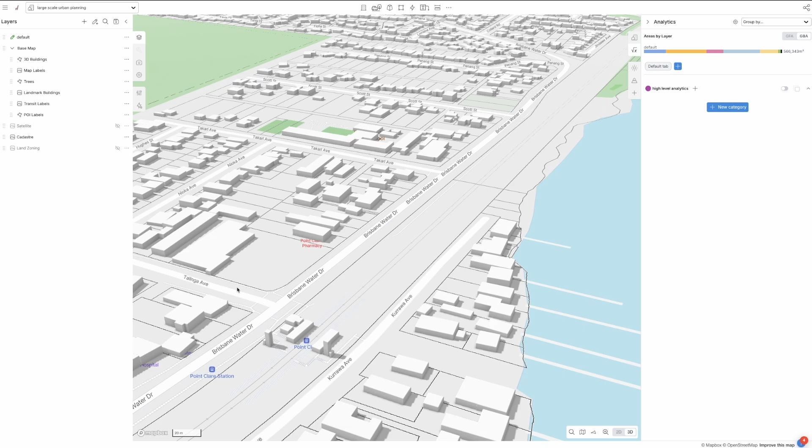In this demo, I'm going to show how Giraffe can be used for large-scale master planning. Now, it's much the same way in which Giraffe is used for small-scale site planning or site feasibility, plus a little more, plus a few extra tricks and techniques. But the first thing to do is understand exactly how Giraffe works at a low level. And when you do that, to blow it up to a high level will be quite straightforward.

So the first thing is Giraffe is letting you overlay the data. So this is the geospatial data. We connect to tens of thousands of data sets that are in public. But if your data is not there, you can very easily connect to it to a map server or feature server or an OGC server of some types, WMSs, or upload shapefiles, other geo formats like a GeoJSON, or just raster, like just some screenshots.

You can geolocate them. And say someone's done a sketch of a master plan, you can just upload that sketch and model over it. And that's very critical when you're master planning, because basically that's the context. That's what's going to drive your decision making, perhaps more than any other single factor.

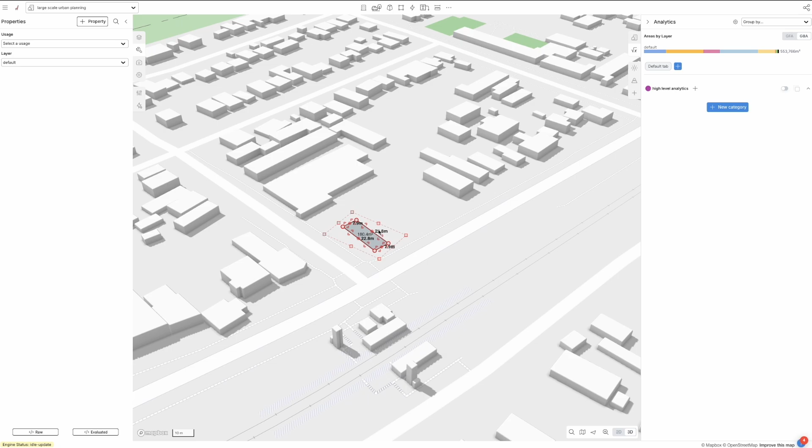Now the next thing that Giraffe does is lets you draw shapes straight on the map. So let's say I'm looking at this site over here. I'm going to draw a building. You can see it's to scale, it's geolocated, and I can sort of change things around. Now, currently, when I say building, it's actually just a polygon. So to make it a building, we have to give it some data, so give it some assumptions.

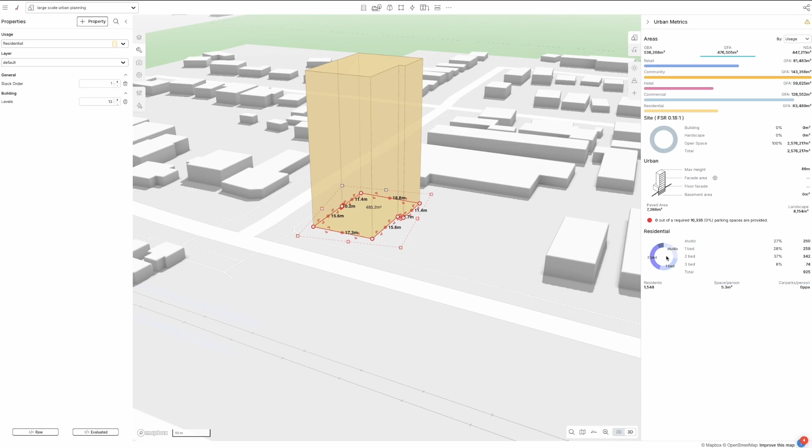So I'm going to say this is a residential building, and all of a sudden that building pops up. And I can add levels or remove levels. And the color and the areas and the number of dwellings that Giraffe is suddenly displaying on this right-hand side are coming from the intrinsic properties of this polygon. So its area, its perimeter, and the assumptions in the residential usage. So Giraffe typologies or usages are the controlling assumptions which sort of underwrite the deal.

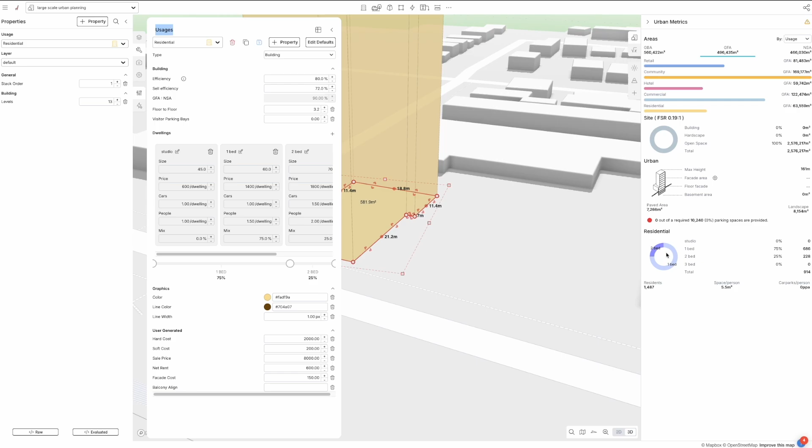So for example, if I get rid of all 3 beds and make this building a combination of 1 and 2 bedrooms and leave its efficiency untouched, I hit save, you'll see down here now we only have 1 and 2 bedroom units visible in the scheme. And that's because this building and these assumptions are combining to this output. And I'll show you in a bit how you can make custom analytics.

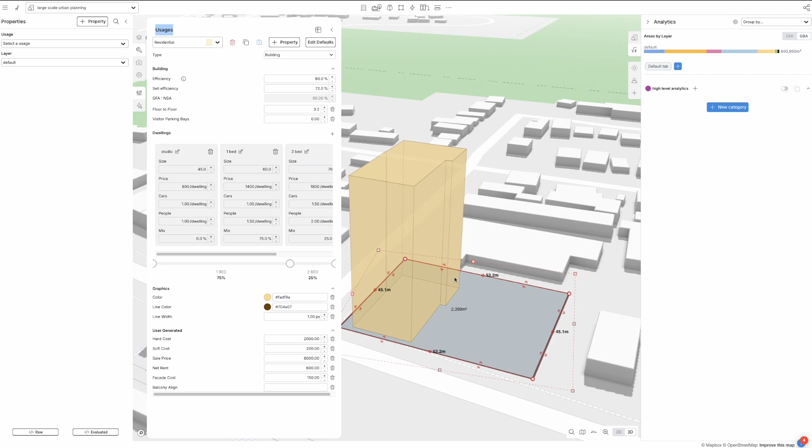But for now, as long as you understand that Giraffe is a data-rich map of the world upon which you draw geometries and you assign assumptions to those geometries, and that means that Giraffe is able to use those geometries to drive analytics and reporting, you've got the core of Giraffe at a micro scale or a site scale, but also at a macro scale. But when we're talking at a macro scale, often the geometries don't just represent buildings.

So let's jump to a macro scale, something like 5 square kilometers. So that's even this gigantic area. That's only 2.5 million square meters, so 2.5 square kilometers. So I'm not going to master plan the full 5 square kilometers, but I'll start doing a big master plan. And the first tool that Giraffe has to help you do that is what we call land uses. So that's something like commercial core. So I could say, look, I'm going to draw a commercial core in my new master plan zone like that. And that's just a big blob.

And if we open that up, it's got a floor space ratio, a height, a site coverage ratio. And that's enough to calculate, without drawing the buildings, what the built area would be, because that's going to be the control to which the private sector developers are actually going to build. So they're not going to build the blob. They're going to build lots and lots of buildings inside the blob, but those buildings are going to add up to the floor space ratio times the area of the blob times some take-up factor.

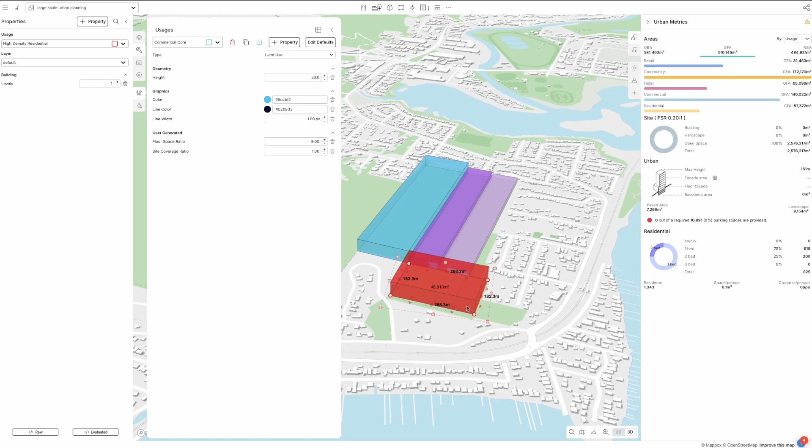And the reason we are doing it like this, let's call this high density residential, is because we don't want to overwhelm ourselves with detail. If we do, and we start arguing about street placements, etc., we can very, very quickly become overwhelmed and start missing the wood for the trees.

Right. And let's say now, let's actually add some roads. So what I'll do is I'll grab that, I'll use the X key and do something like this. So we're just going to connect these roads on like that. And then maybe there's going to be a cut through road, something like this. Okay, there we go. Now, what we can do is we can pull out the road reserves and actually show what they would look like.

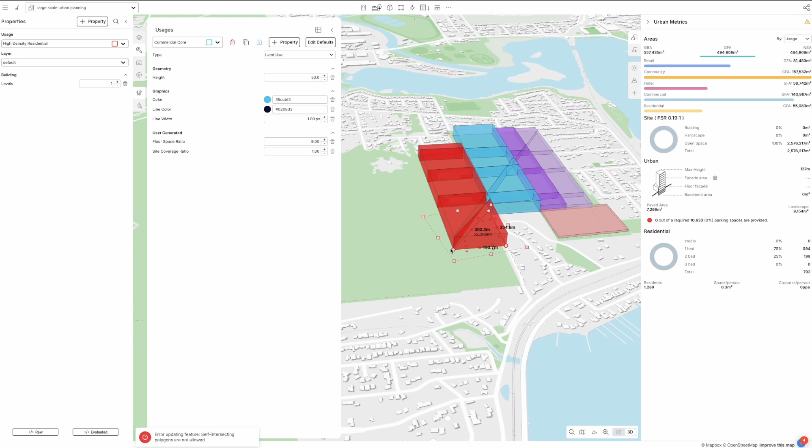Or we can leave those road reserves visible. And both methodologies, from my perspective, work great. I've seen in various cities both of them taken. I'm actually going to cut the road reserve out just so we can see it explicitly. And I'm using liberally the X key.

If I turn on the actual land zoning in New South Wales, you can see they do not cut out the road reserve. You can see the polygons touch. They don't give a gap for the road. Whereas if I turn on the cadastre, you'll see there's a gap for the road. But the land zoning itself goes over.

In fact, certain roads have their own SP2 use, which in our world is a special purpose use, which we very well could do here. So one could, if one were keen, draw something like this and give it a special purpose use, but I won't. All right, this is looking good.

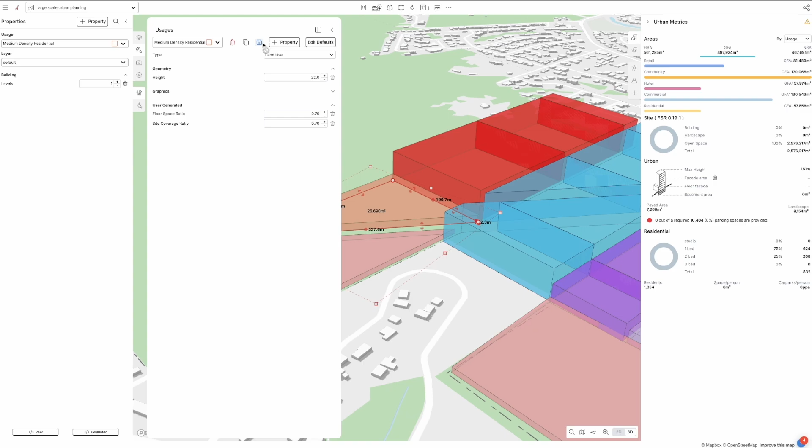Maybe we do this. Now I can use the eyedropper key to lower the density over there. Let's call this medium density residential. So you can see there. Now that transition from low to medium to high is not right, but I have full control over the assumptions. So I'm going to get my medium density residential. I'm going to set that to 22 meters. And I'm going to save. That's going to jump up there now like that. And this is starting to look good.

I may say, why don't we put a bit of a high residential core over there? I may actually say, this commercial core, we're going to override the height. So I'm going to grab a height property over here, and I'm just going to override this at 100 meters. And this will start to look familiar. This will actually start to look like a town plan.

Now, this is only half a square kilometer. So despite how crudely I'm working, you can see how long it's going to take to do 5 square kilometers, about 10 times as long as this. So I'm going to stop here, and I'm going to quickly just add a measure just to show what we can do. So why don't we add the derived population here?

So I'm going to add a measure, and I'll say projected population, and it's going to be in people. And I'm only going to apply it where the usage is equal to high density residential, medium density, low density residential, and also mixed use. So I am not going to use this actual residential key usage. That usage is a building usage. So I'm going to do that. So that's going to filter the geometry, the Giraffe model.

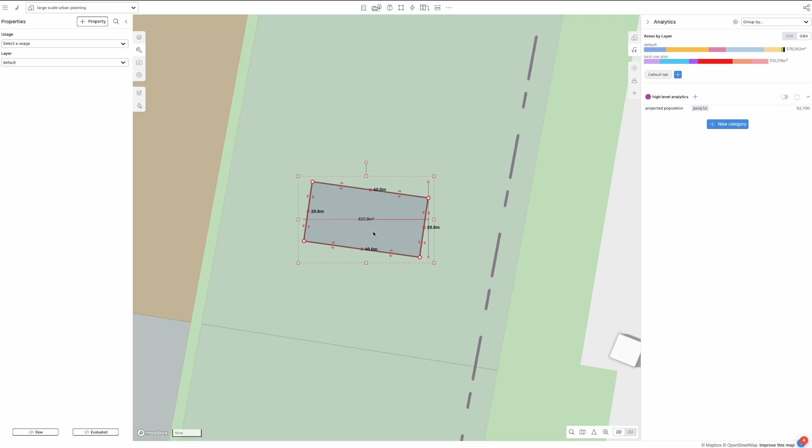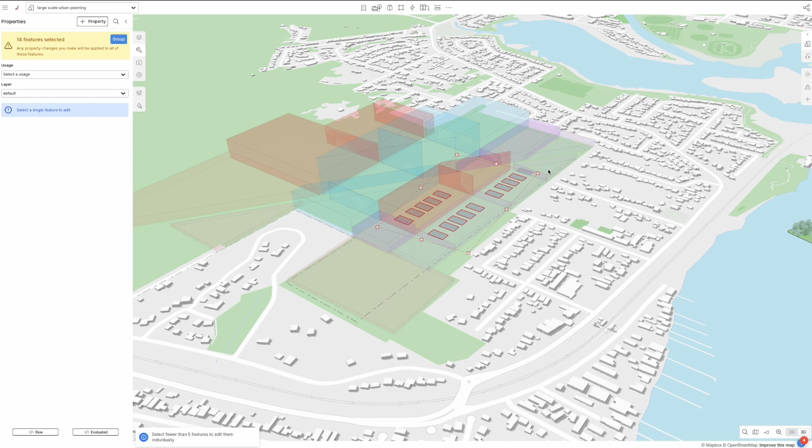If we were to draw every single building manually, an 800 square meter building is actually a good size for an apartment. If we were to go like this and this, it's going to start taking a very, very long time, far too long to be worth it. Giraffe does allow multiplayer, so we can share this project and then other people can hop in live. And so you can actually make pretty rapid progress just by copy pasting stuff around the map and designing bespoke sites.

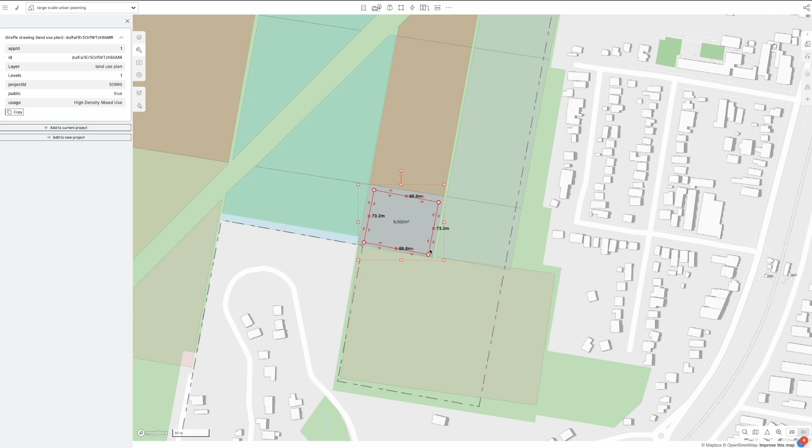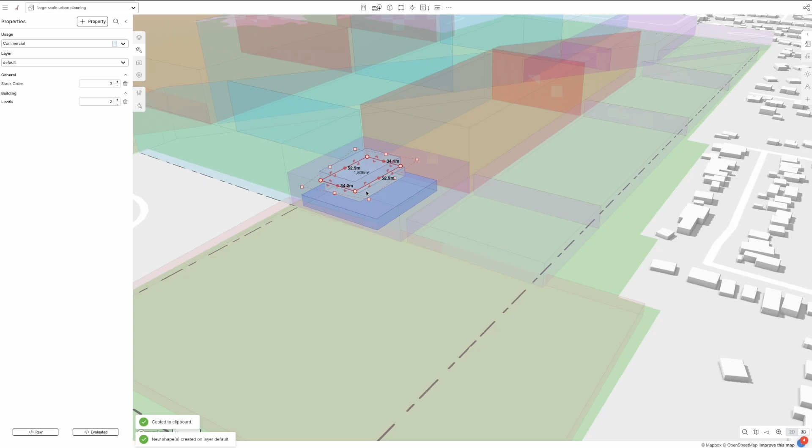So say, for example, this is a land use, this is high density mixed use, right? So I could say this was my responsibility. My team has given me these sites. I could very quickly do a podium and make it retail, 2 levels, straighten it up, pull back like this, and then draw some commercial on top of it. 2 levels of that, and then copy and paste that and get some residential on top of that. Shrink that down, right?

And you can see I'm penetrating the height plane as allowed by my zoning type. So maybe I'll lower that number of levels, and I'll do more of a U-shaped building. So we're not doing a point tower now, we're doing an actual U-shaped building. And at this point, you can see I'm slowing down because I'm trying to get the built form accurate. So a 20-meter depth for the buildings is actually buildable, or else you're going to get these very deep apartments.

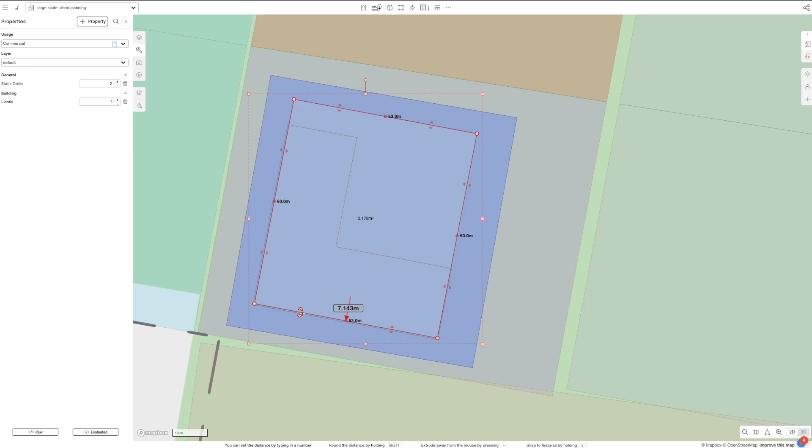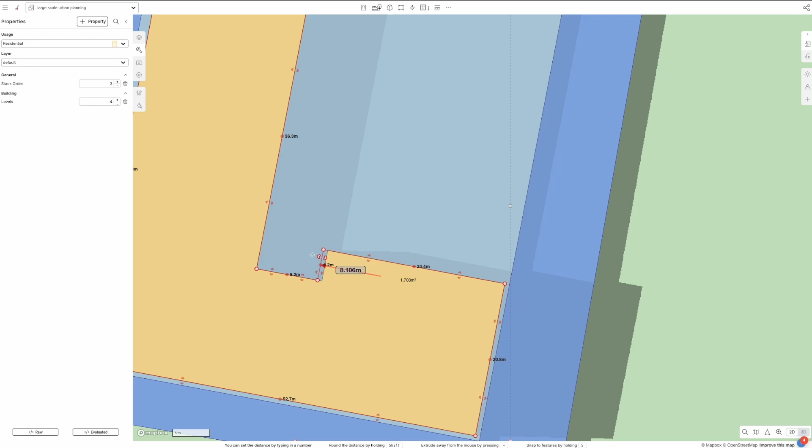And if I turn off the land use plan, you can see what we're dealing with over there, which is not quite a building, but it's a much more detailed envelope about what a building may look like. It's taken all of 3 seconds, which is good because we've got a lot of site to do. So if we turn this back on, get it back down to 10, we can then start going site to site. And of course, we can make liberal use of copy paste where we can, but this is still quite a manual and slow process.

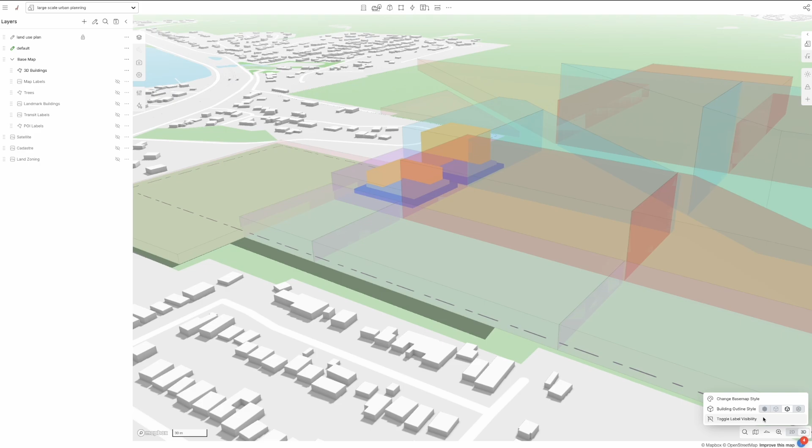I'm going to change the render methods here and just turn that on. And that's for some reason turned that on. That's fine. And that just displays the floor plan. So now you can actually see more what we're looking at. And as we're working, what Giraffe's doing is it's gathering these areas and it's grouping them up and it's looking at them. What I would actually do is in my settings here, I'll turn off the charts, and I will also group by layer. So we'll see default in the land use plan.

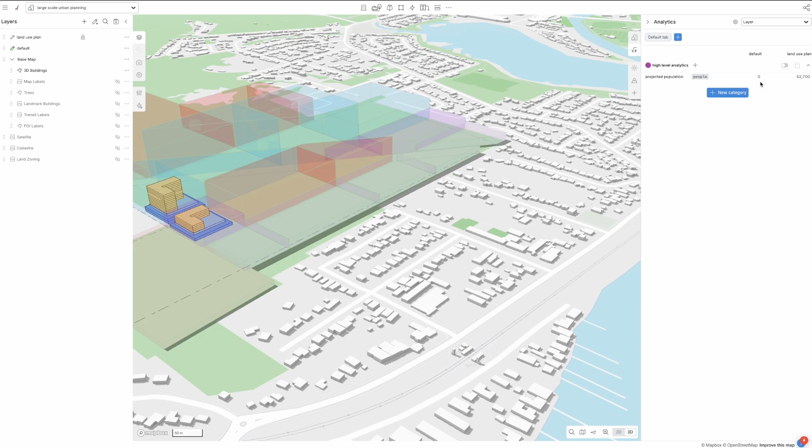There's no projected population on the default because remember in this metric, we only apply it to those land uses, not to this residential use. So to apply it to the residential use, what we would do is duplicate that. And then hi-fi pop forecast. And rather than doing this, we will filter it down to the residential use. And we'll go area times, we won't go to floor space ratio. What we'll go is net area. So actually we'll go saleable area.

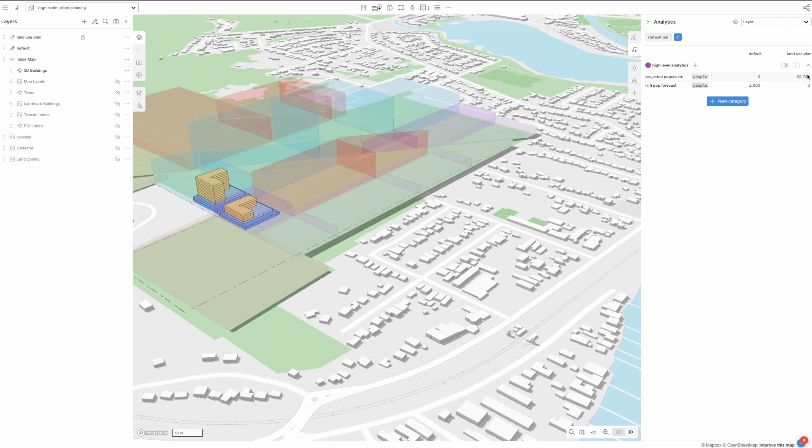And the calculation will be a little bit different. It's saleable area. There we go, divided by 80, times 2, and then we save those changes. And that's only 2,000 now because we've got a lot of sites to fill up to make this number match that number. So hopefully that makes sense.

And now in the last few minutes, what I want to do is show you a couple extra tricks. And now in Giraffe, we have a whole set of ways where we can automate things.

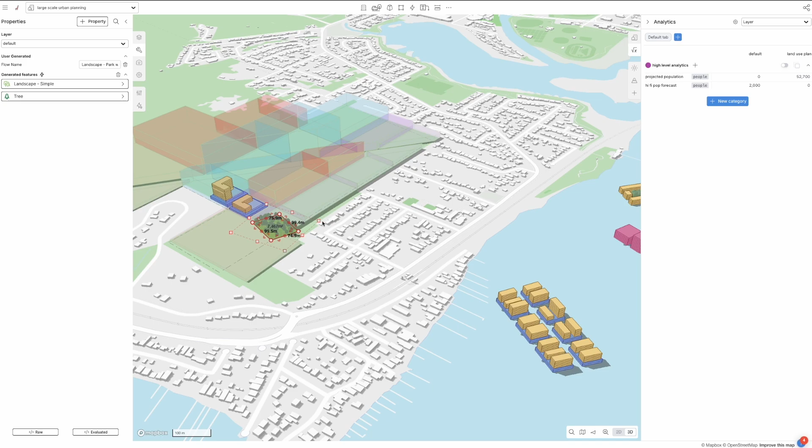So say, for example, we're doing some landscaping plans and some street plans, built form, public plans. I want to do this park. Now, I want a park, I want it to look beautiful. I want lots of trees of different sizes, but I don't want to manually draw each tree.

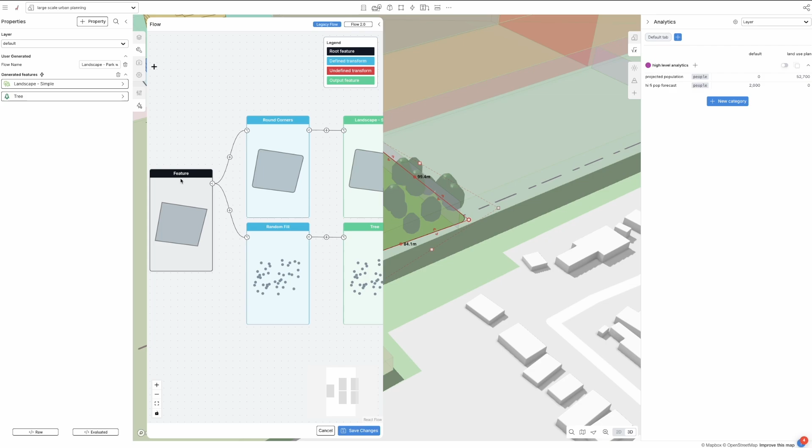And what Giraffe allows us to do is to define these logical flows. We call them a flow. And what they are is they take a geometry, which the user draws, which we call a feature, and they just do things to that geometry. So in this instance, it grabs the geometry, fills it up with points, and then makes each point a tree. And that's how you get this.

Oh, it also grabs that geometry, it rounds the corners. So you see the raw geometry is pointy and the derived geometry is round. And this automation at a geometry level is extremely efficient. And I'll show you a few more of them.

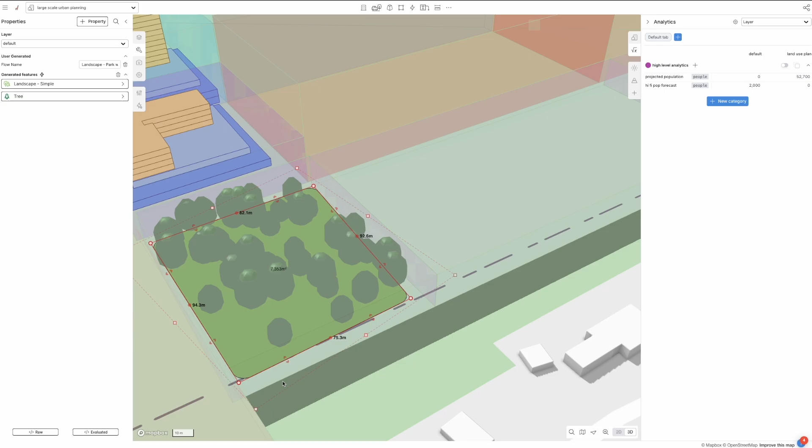So here's one here. This flow, if we open it up, is a bit more complex, but all it's doing is it's using our subdivide lots algorithm, and then it's doing a few things. It's finding one of the edges of the parcels, and it's setting the height in relation to the distance from that edge, and then it's applying a usage. So if we go like this,

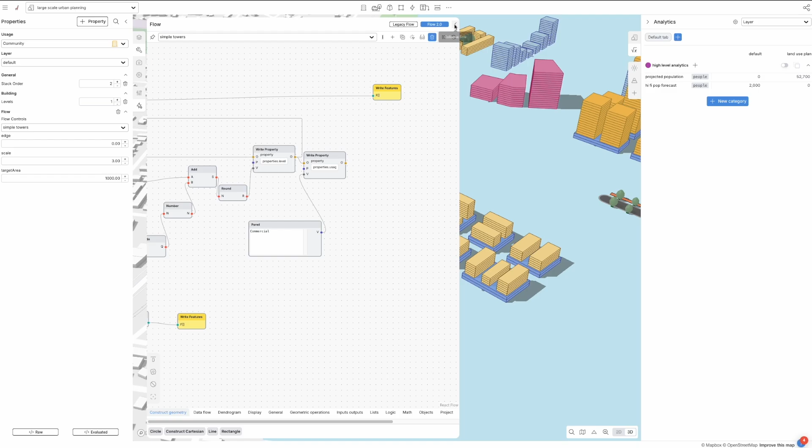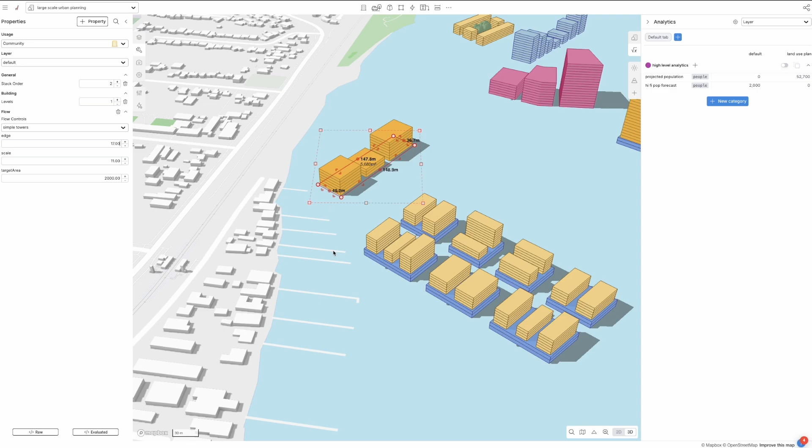it looks like this, and we have these parameters where we can make these buildings bigger or smaller. We can scale them up heaps or down heaps. And if we change the edge, we can change kind of where their heights are biggest and smallest. And I've introduced some sort of random variability to the height, which we could expose as well.

And the thinking behind this is this zoning plan, probably people are not going to exactly build to this height, right? Depending on the market scenario, people will do different things. And maybe someone gets an exemption, or maybe there's some existing buildings. Maybe commercially it only makes sense to build a little bit.

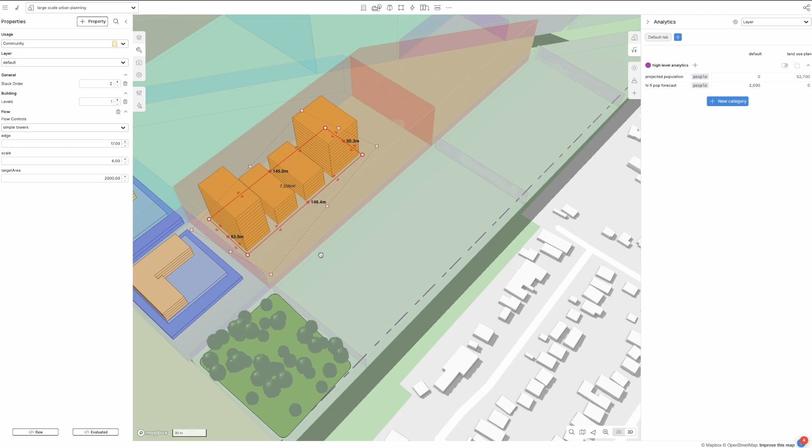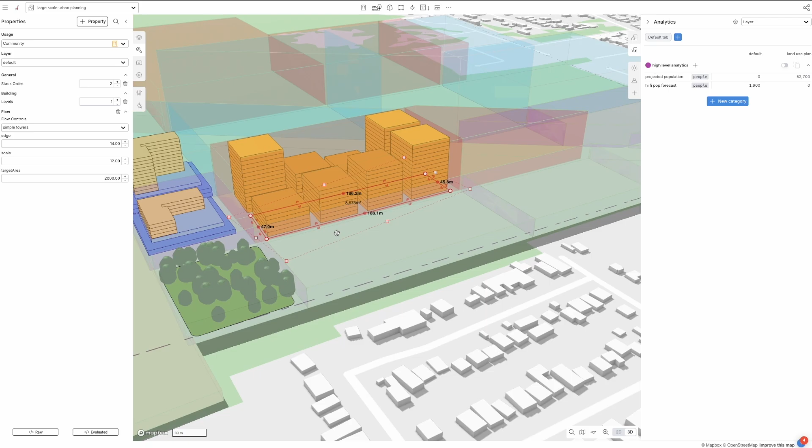But the point here is that this uptake is not going to be 100% uniform. And if it was, it very well might be an adverse result. Like it may not look as good as what we'd want. So here's a kind of accelerated way of filling this with realistic looking built form.

And as we're doing this community use over here, this is all being calculated live, and these analytics are reaching into this. And because we're separating default and the land use plan, we're looking at the same land use plans with different lenses at the same time. So that's one kind of acceleration.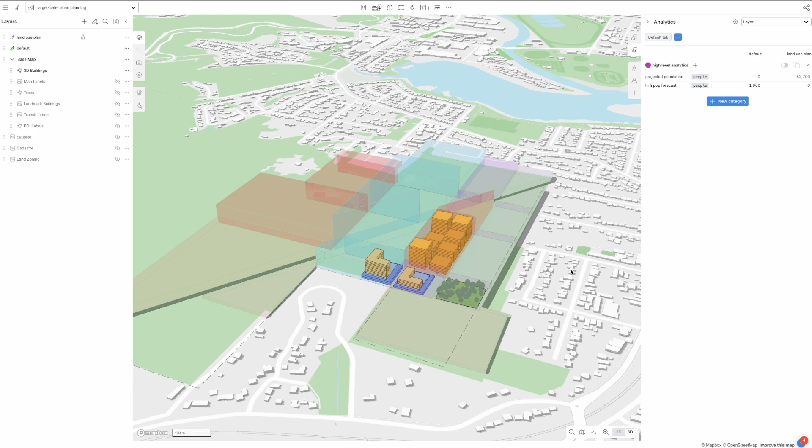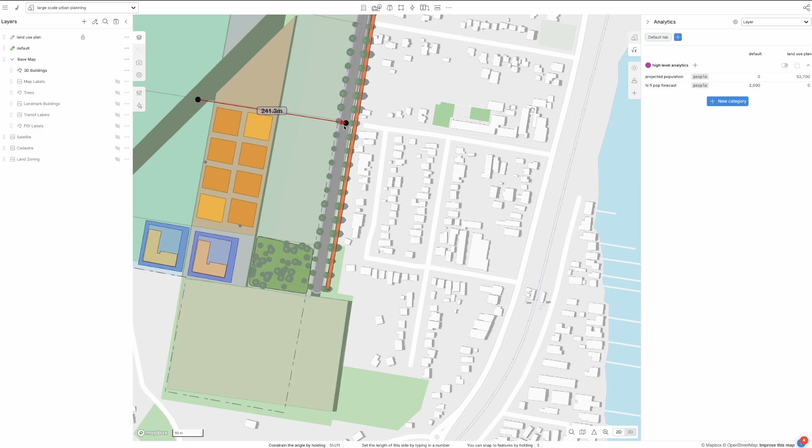Of course, a really nice one like this is for public realm modeling. So I can draw a line, I can use my eyedropper and apply a road, and this is applying a cycle path and assigning some trees to the road. And I can very quickly add to that by drawing more road. And Giraffe is pretty good at connecting this stuff, so it'll try and connect those for you.

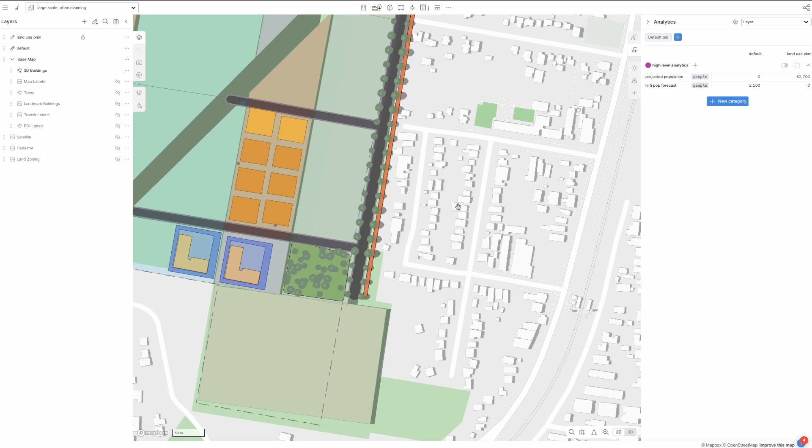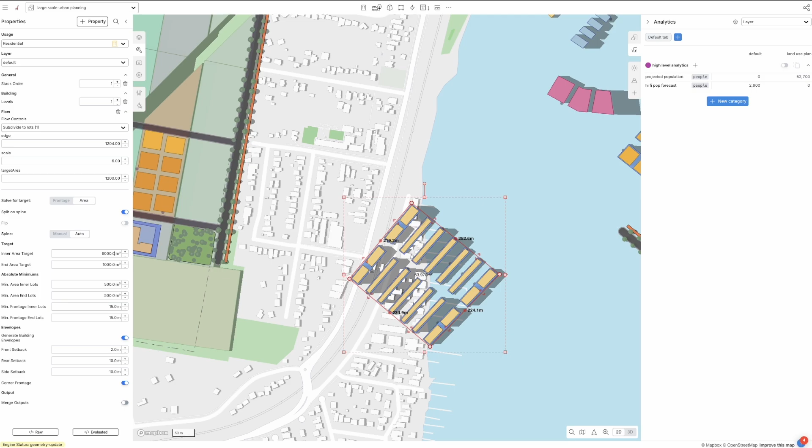Now I want to show you the next level up. So this is quite a simple automation. This, on the other hand, is quite a complex automation. What this automation is doing is it's taking that simple automation and it's assigning it to multiple parcels. So we're actually iteratively assigning these rule sets to these parcels in such a way that you get this really nice sort of urban effect. So we're using random numbers and iterative application.

So take a site, subdivide it, and then subdivide each subdivision to make buildings and apply different rules on each subdivision to get this kind of not organic but urban appearance. And so you can see the approach I've taken here. I've actually preset these rules up.

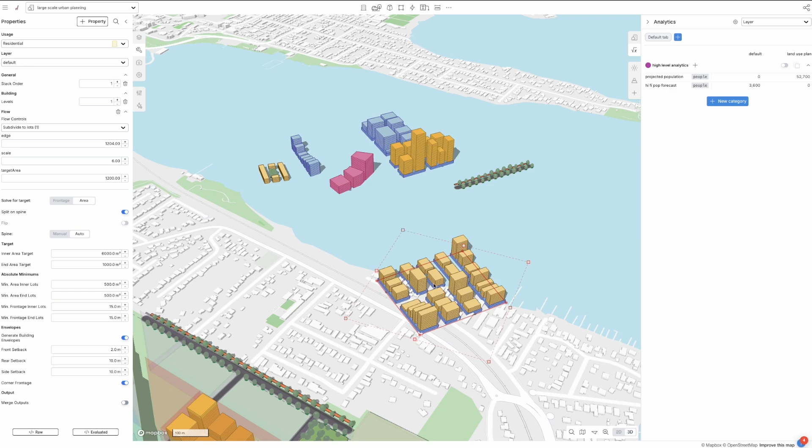And so what I'm able to do is say, okay, well, here's our urban core. Why don't we do this? And then we go Y and eyedropper that, and we get that. And that's not exactly right. Our urban core is a bit higher. So we'll increase the height, something like that. And then we've got to adapt it to the street, something like that. So this becomes very fun.

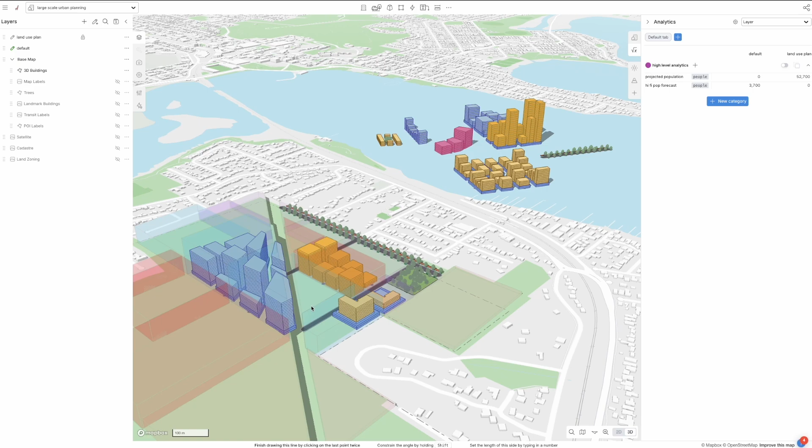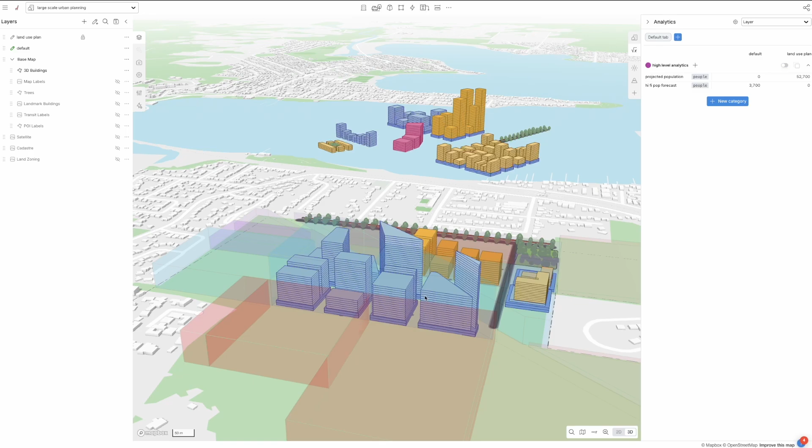Now, this slanting, these parcels that the algorithm is generating are not quite right. So what we're able to do is do stuff like this that actually straightens them out. And you actually get these really nice semi-organic, semi-unorganic built forms that look awesome. So that could be urban core, and this could be mixed use.

And what Giraffe's doing is assigning these rule sets and then allowing the user to tweak them in various ways, kind of quickly. And almost no different to what we were doing before, just the computer's doing a lot of it. So rather than manually drawing rectangles and copy pasting them, the computer does the copy paste on our behalf, which is lovely.

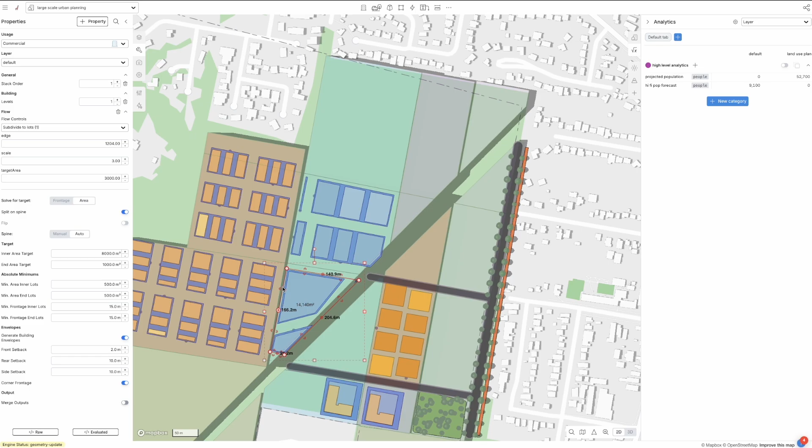And much more representative, right? So I guess the intention of doing something like this is that you get a more accurate feeling of what this place would look like. Now, it's not 100% accurate, and it is honestly a little bit susceptible to misleading you, but it is nevertheless often useful.

So here you see that's grown too high, so I'll just factor its scale down. And it's convincing. And let's do one more of these. So we'll draw geometry here like this, pull it back like that, and do that. And then why don't we draw up an inner city park? There we go, kind of like Times Square style vibe.

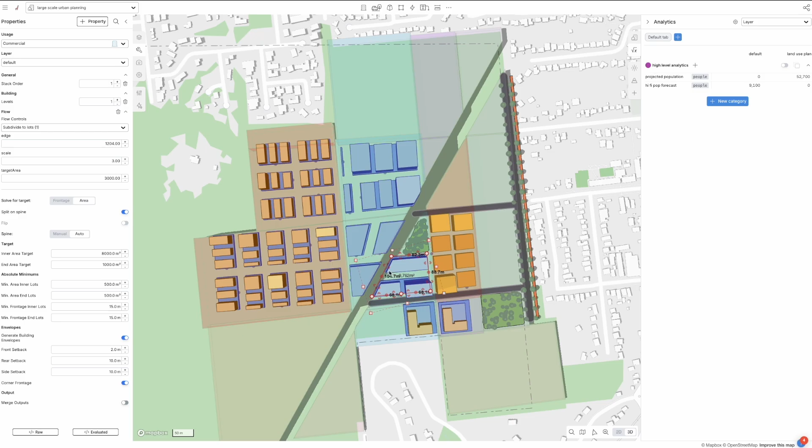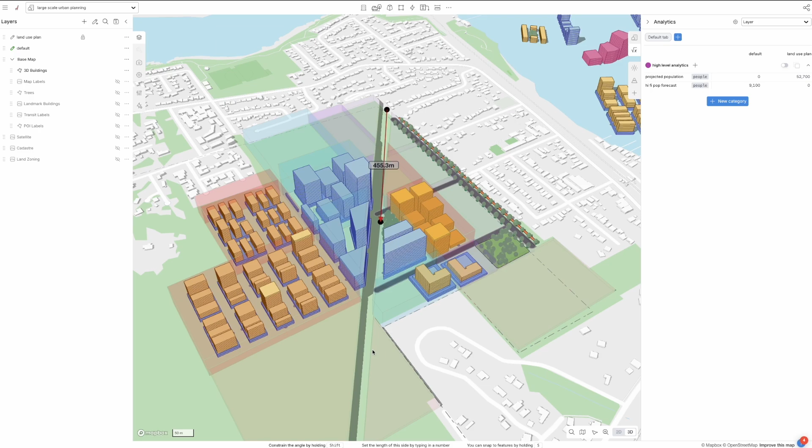So you can see the approach here is that I'm an architect and I'm drawing and thinking, and the computer's kind of going along with me. And maybe here we have to draw another road, and maybe this road is very roady. It's not avenue-y. It's a proper 30 meters of tarmac with a wide 4-meter sidewalk, and trucks holler up and down it all day, something like this.

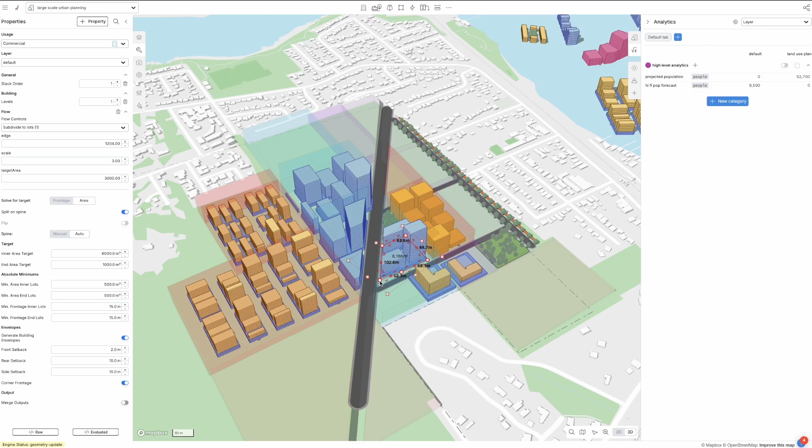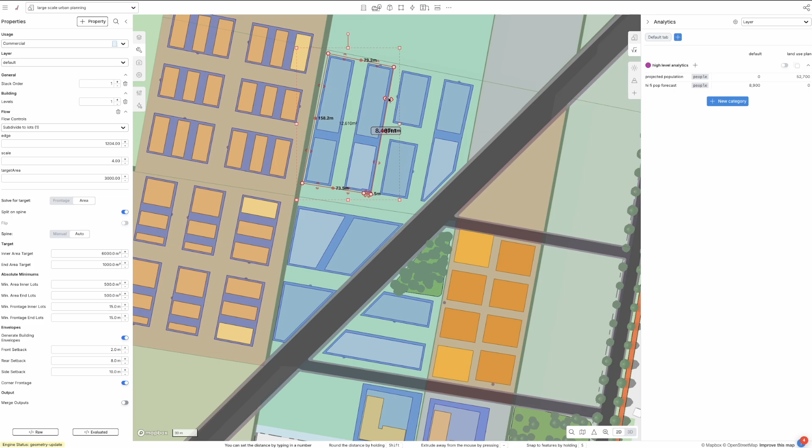There we go. You see that's too big for me. So what we can do here is change this to a smaller subdivision target, something like this, but even then that's not working so well. So we can slice it. We have a lot of levers to pull to make this algorithm do what we want it to do. I think that's maybe slightly too big, so I'll go 8. Yeah, that's looking pretty cool.

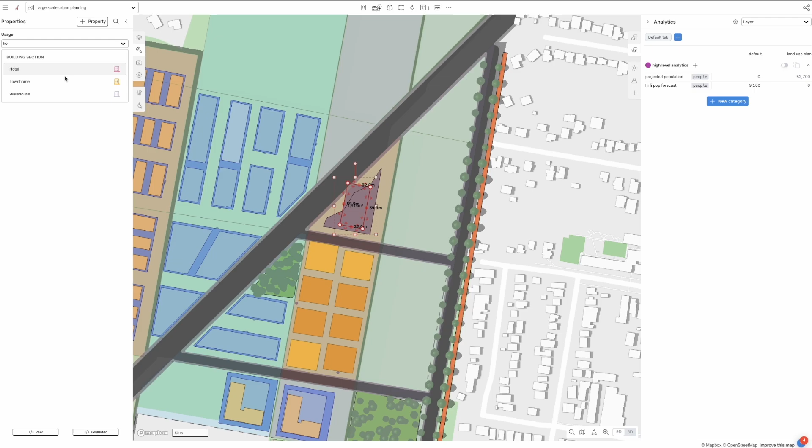And say we've got a hotel precinct, we can actually manually design. So we can say, this is a star site, a key site, strategic. We're going to design something really good here. Either you or your architects can hop in here, we'll put a hotel, and we'll make it look designed, like something from Rem Koolhaas or Zaha Hadid. And let's make this retail.

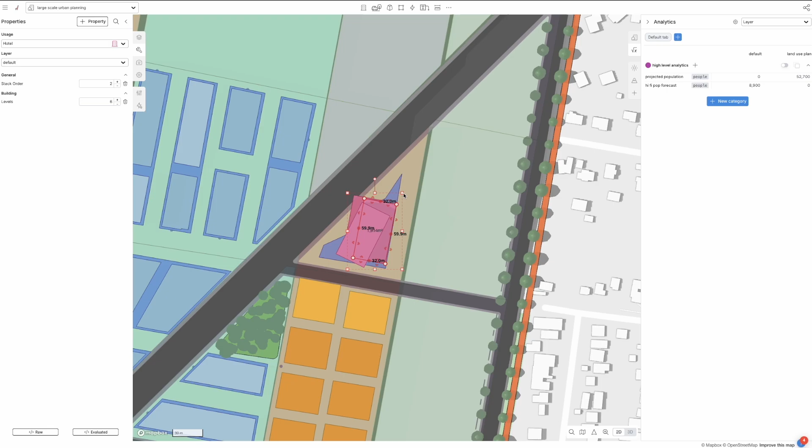Okay, so there's our iconic building. Maybe let's break the grid. Something like this. Get alignment to that street. Yeah, that's cool. Won't stand up, but next week's problem.

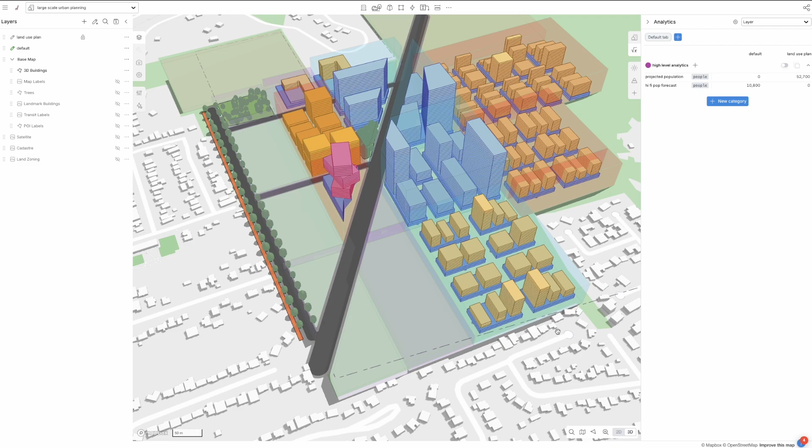Now, when we look at this, the forecast shows 8,000 people. I think we're a bit shy. We could be adding more people over here. So we're designing a really large urban environment here. I wouldn't underestimate the scale of what we're doing. We haven't even filled this. If you're talking about 5 square kilometers, depending on your density, you're looking at huge populations. Let's lower that down somewhat. There we go, a bit lower.

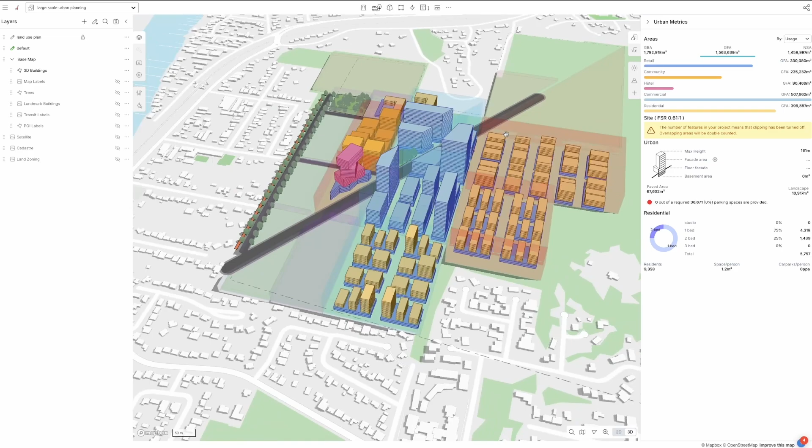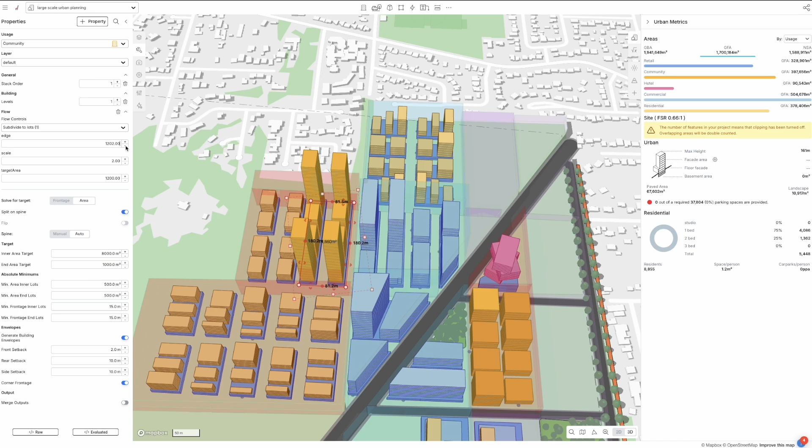And we're talking about, in terms of areas, 500,000 square meters of commercial just in this little rectangle, although we are double counting some of this, so bear that in mind. But we're not mucking around. All right, now I want to try one more thing. I want to change the edge here and then factor that down to 12. Maybe 11.

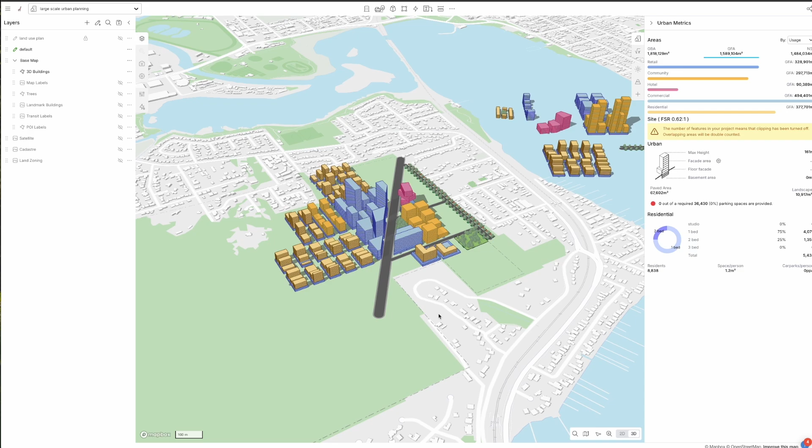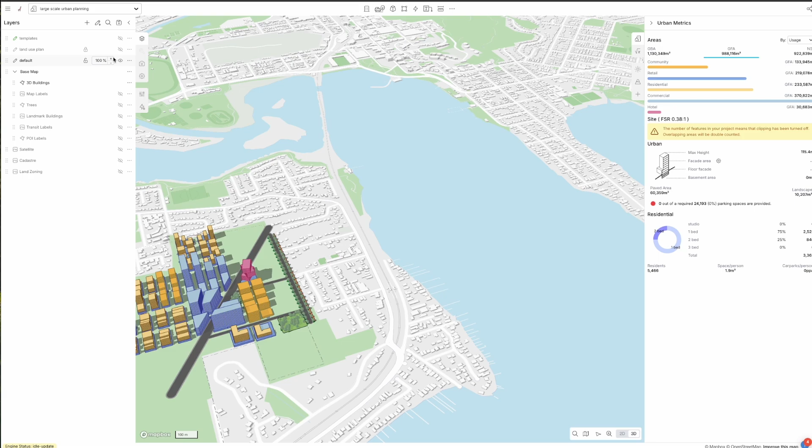These scripts that you're looking at here can be built by anyone who is competent in Grasshopper or computational design, Dynamo, Python, etc. So in-house, or we can do it as well. Okay, so I'm going to pop these things on a template layer and then turn that layer off. This default layer I'm going to put down to 97 so there's no sun, and turn off the levels. That's going to help my graphics card from a performance perspective.

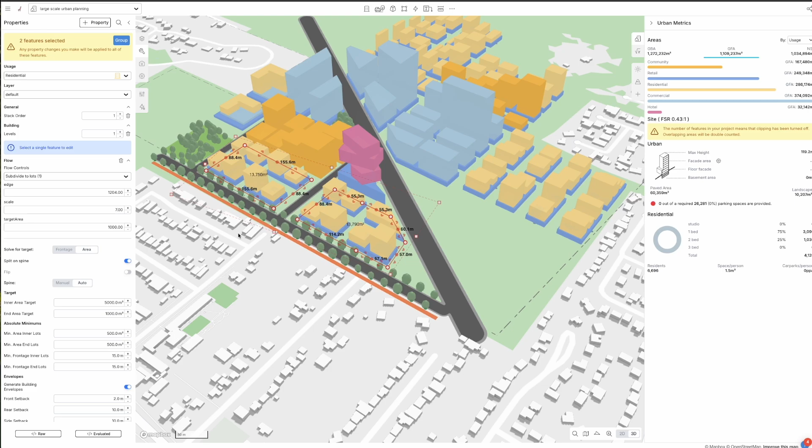And do I feel happy about this all? Yeah, probably. I feel like we need some more of this over here, and we also need them over here. And we'll have to do something like this to straighten it up. Cool. And maybe let's put a corner park there actually, and factor these guys down a bit shorter. All right, so we've got ourselves a pretty good scenario here, and Giraffe's doing most of the work for us.

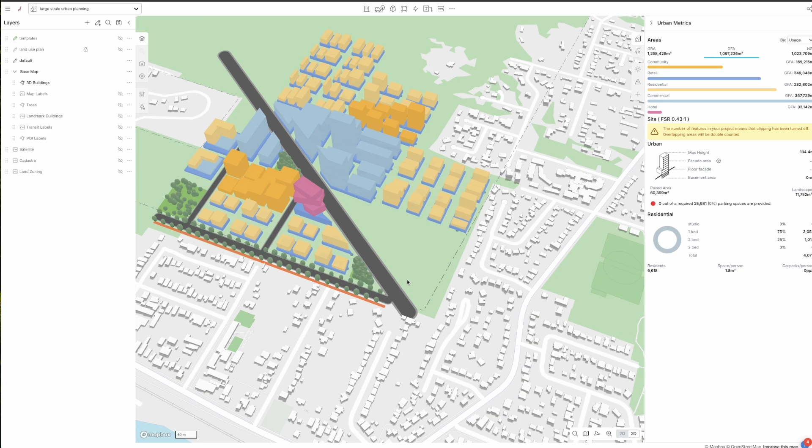And I want to try get some renders out of this now, so let's open Visoid. Okay, so we're over here now. It's looking kind of good. Let's say we're ready to rumble. Let's do one last signature building in our precinct. Sorry, I'm drawing on the wrong layer. And I'll use the polygon. Let's put a stadium in.

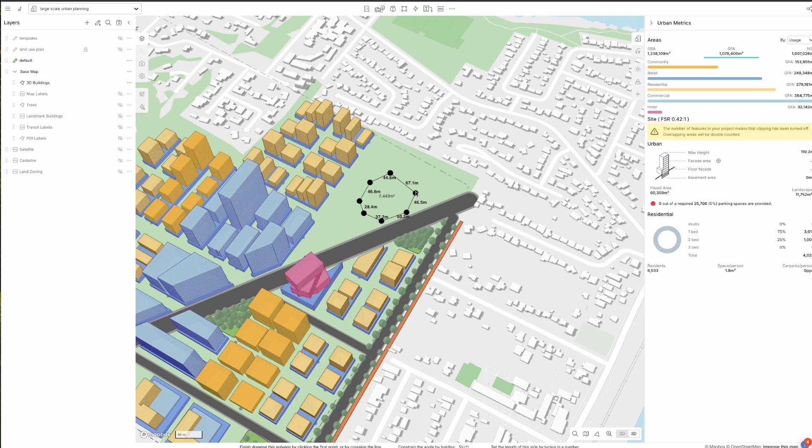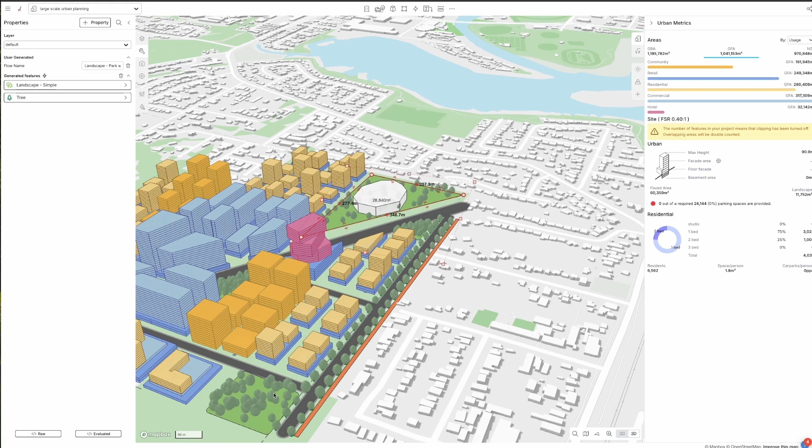Now let's see if we can get some renders out of it. I'm going to turn the satellite layer on, and take a screenshot. And I'm going to open Visoid, log in, and see what we can do in real time.

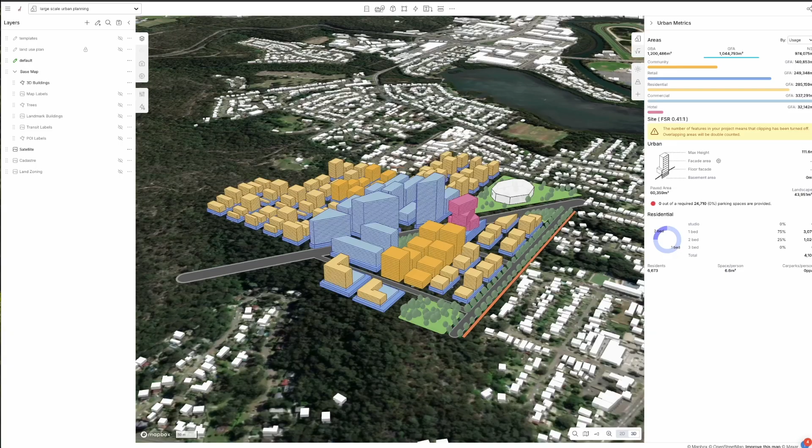Whilst we're waiting for that to upload, we'll come back to here. And I'll show you another way that we can use to get some realism in these buildings, and that's actually using Giraffe's native vector renderization. Now the way that works is we are going to apply an algorithm that's going to create a facade. So just like these algorithms create a built form, we're going to use a different algorithm to create a facade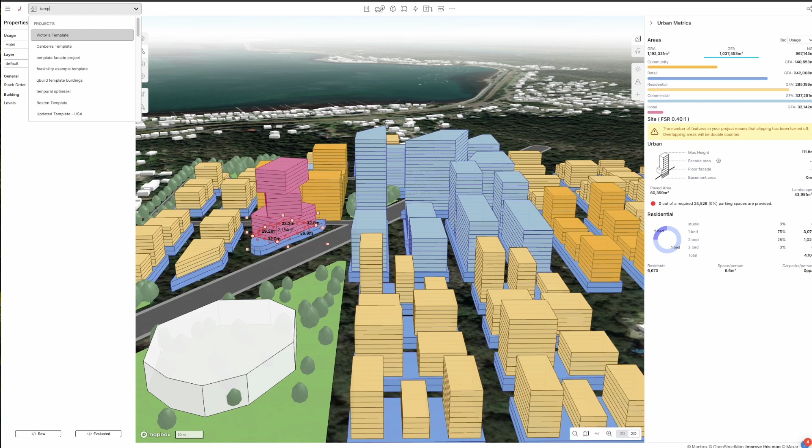over here. And I'm not going to do it from scratch. What I'm going to do is open my template facade project. And here it is. Okay, that's a beautiful little project. I want to copy this. And I'm going to go back to our plan. And I'll check on Visoid as we're there.

Okay, great. Now, aerial view of modern city, summery, Australia, green, vibrant, many materials, modern. And the input level is a volumetric in the park. And let's do 4 images and generate. Okay, so we'll see what Visoid can do. And while we're waiting for that, that's our artificial intelligence friend doing our job, and we'll keep both of these.

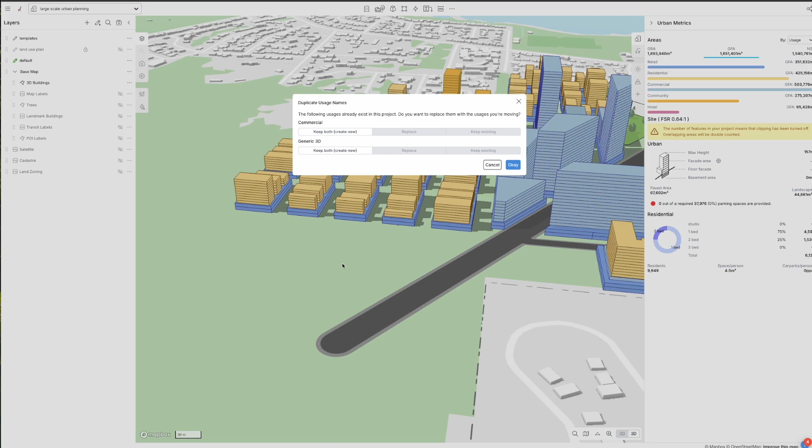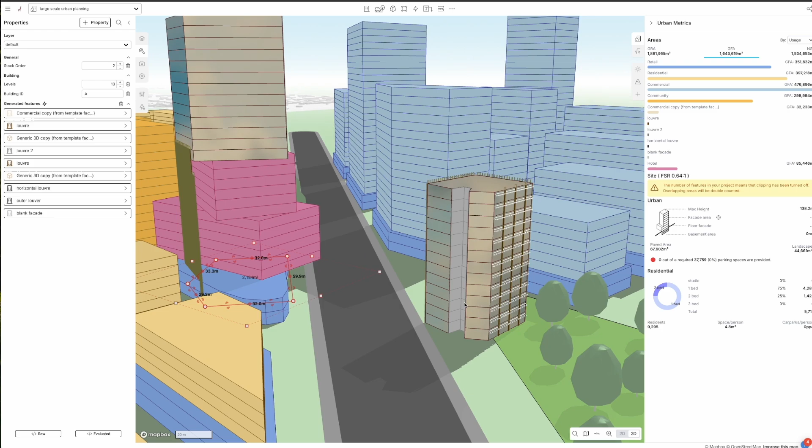I'm just going to paste this geometry in. There it is. Okay, so you can see here I've pasted this in, and it's got a facade. So what I'm going to do is I'm going to do that and drop the number of levels and drop the stack order, and then get my design back. And now I've got a building with a design, with a facade on it, which I may be happy with.

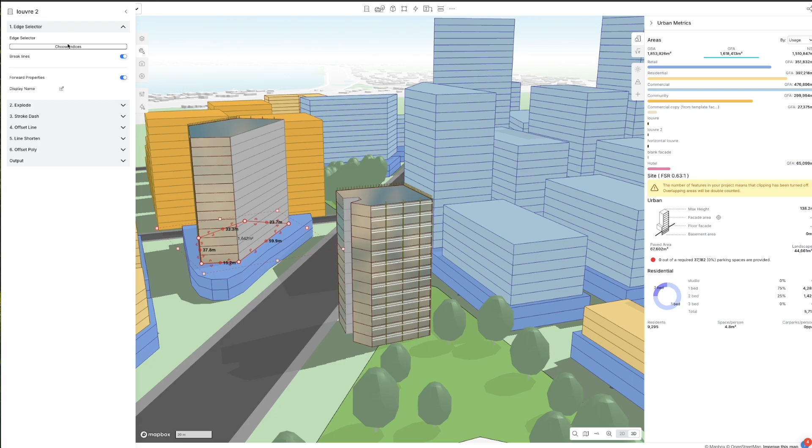And maybe I'm going to update this building. Maybe I don't need this silly block and stack. We're going to do something like this. But this thing certainly does need a change. It needs more facade on this road. So if we go to this and we go to the edge selector and we choose this, we're going to select that. And then on the blank facade, we'll unselect the same.

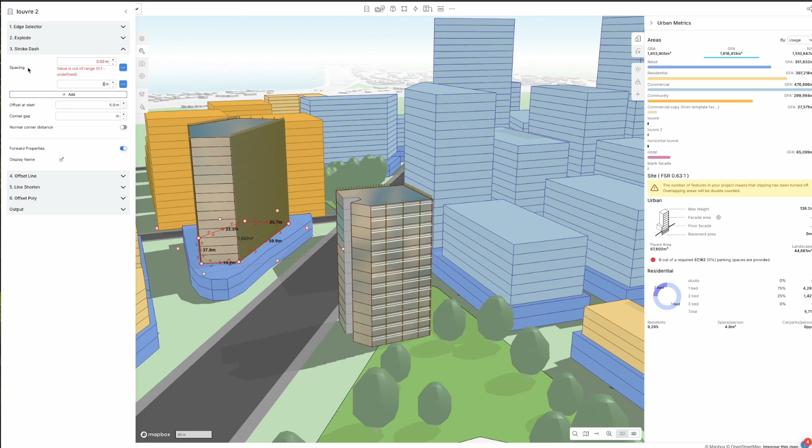All right. And then on the facade 2, the offset, we're going to parameterize this stroke dash. So instead of, sorry, on louvre 2, instead of a small stroke, we'll get a big stroke, like 3. There we go. And this is a way, one technique among many, of doing detailed renders or visualizations on buildings. So that's giving a much more, I don't know, scaled, picturesque version of what this building may or may not look like.

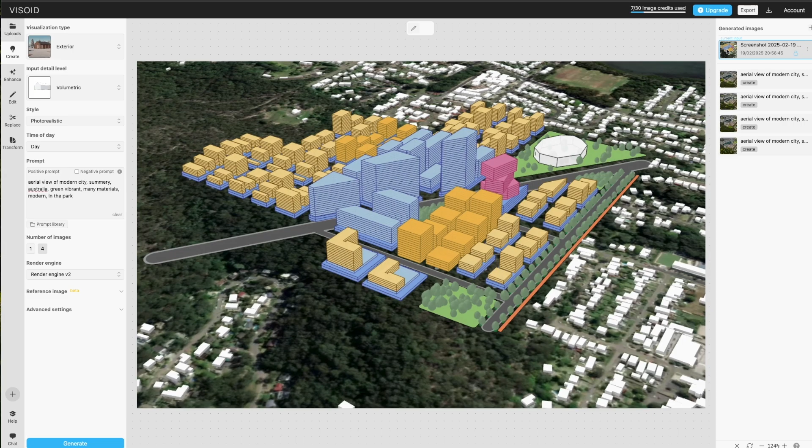We go back to Visoid, and there we have it. So it's picked up that that's a stadium. Here's our built form, a commercial core in the jungle. There's the existing built form. And if we do this, and this, that's real. I mean, this is really cool. We've got to here very, very quickly.

And again, I want to emphasize that these can be mixed and matched. So you could put this in Photoshop and overlay this and that. I kind of like this one because it's got a bit of variability in these buildings. These are a bit different to those, to that, so sort of neighborhoods.

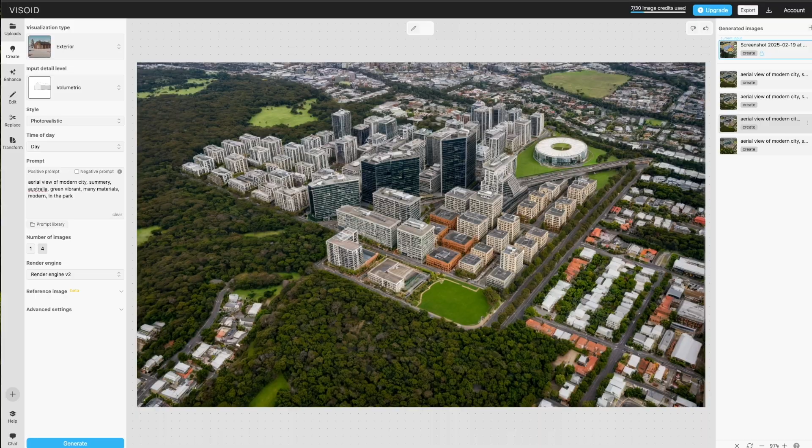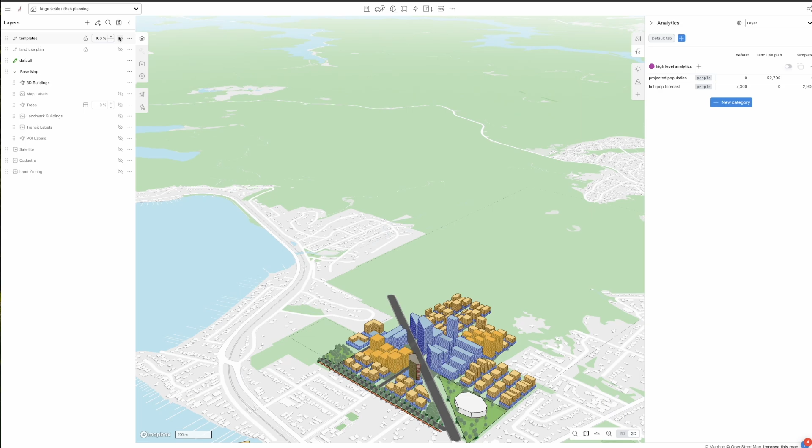All of the areas in the Giraffe area schedule over here, and the modeled out population numbers, etc., are coming from what you see on the screen. They're tightly coupled. There's no, oh, we forgot to copy paste it into Excel correctly, we're looking at the old version or whatever. This is what it is,

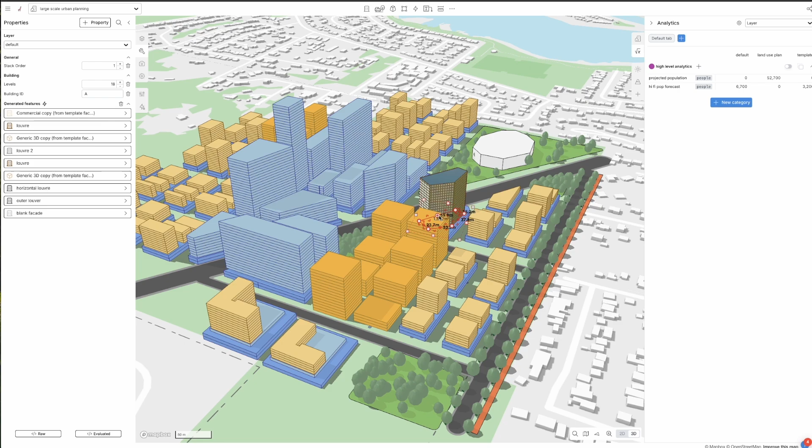which is very helpful. And hopefully as well, you can see where I've left stuff indicative and by the algorithm, and where I've dived in and gotten very fine-grained on the control of what the buildings look like, and how you can do that strategically to use your effort efficiently.

And also how, because we're calculating things in 2 ways, as in we're using the land use plan and this indicative built form plan, we have much more confidence that our numbers are for real. So when we're presenting up into our hierarchy, investment committee, stakeholders, we can rest easy that these things kind of match.

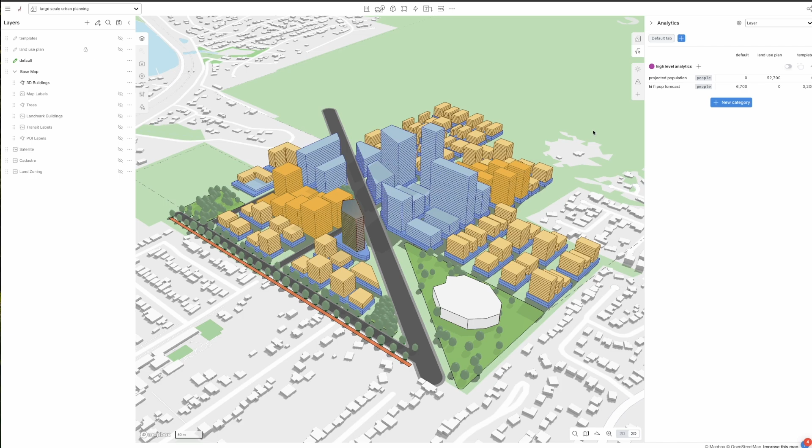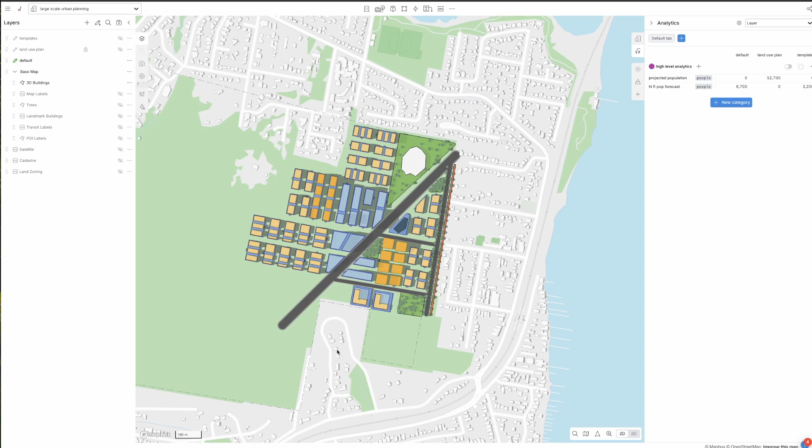So hopefully that's given you quite a lot of idea about how you can use Giraffe to do land use planning at scale. And like I say, this is probably a 20-30 minute walkthrough, and we've done about half a kilometer. So if you multiply it by 10, 200, 300 minutes, so sort of 6 hours to do a 5K master plan. Not too bad.